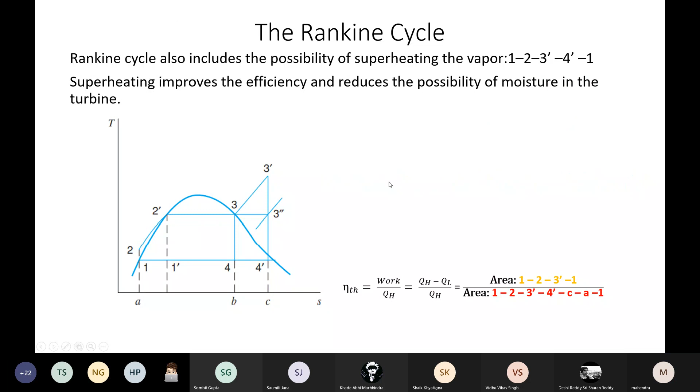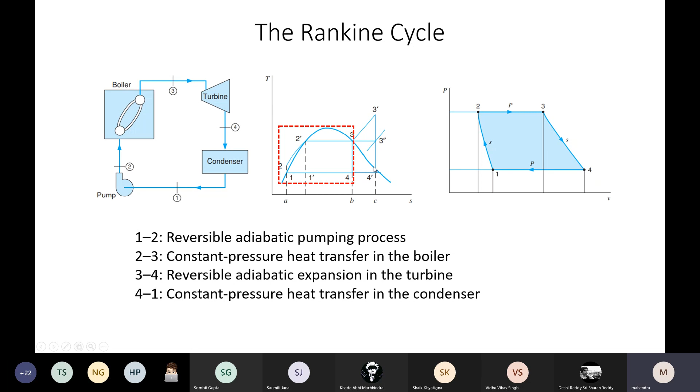Then what will happen if a huge amount of moisture is there? The turbine efficiency decreases; the expansion process is not appropriate. That is anyhow a minor issue. The major issue is the turbine blades will be eroded. These droplets of condensed liquid act like high velocity, high momentum bullets impinging upon the turbine blades, so the blades erode and the surface finish is damaged. Then boundary layer problems will come, as you might have studied in fluid mechanics.

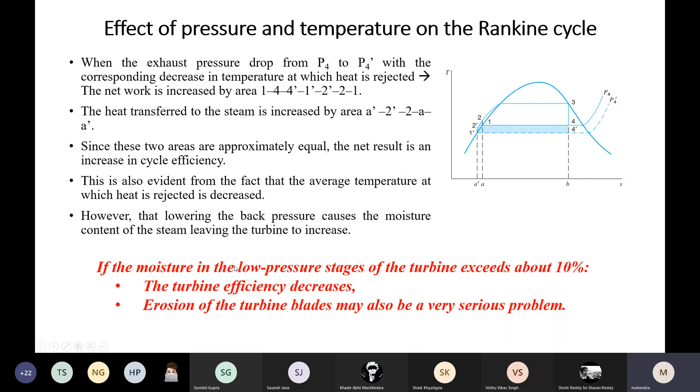So when you are expanding in the turbine, at the exit the moisture should not exceed 10%. Then what should we do? The only way is to increase the temperature of the steam. Then after saturated vapor, the constant pressure line moves like this, and we have taken it up to this.

Then you expand it, and it touches here on this pressure line. So what is the amount of saturated liquid here? A very small, negligible amount, within this 10%, so no problem. That is the reason we heat the steam further to make it superheated steam.

And simultaneously, keeping the percentage of moisture content at the turbine exit constant, once you increase this temperature, you can move more downstream. Suppose I stopped my superheating here; once I start expanding, this line will touch here. Let us assume this quantity of saturated liquid at the exit is just 10%.

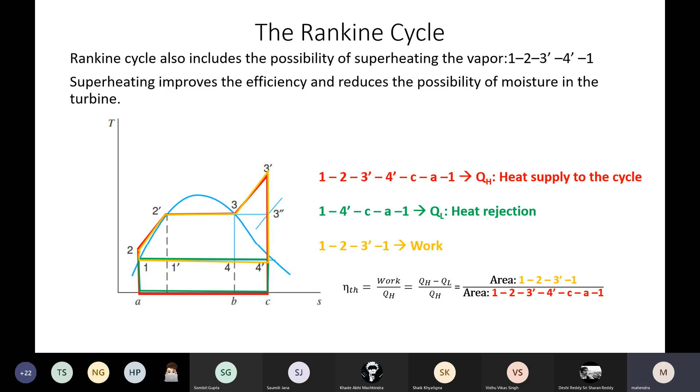That means once you are moving towards superheating condition of the steam, then you can allow the expansion process up to the lower pressures in the condenser. That way you can maximize the work output. You can minimize the heat losses. That is nice. But here the question is, how long can you increase the temperature? If you keep on increasing the temperature of the steam, do you think this turbine material will be sustaining? No, it cannot sustain.

Why? Because whatever the operating pressure is there, that you can convert in terms of stress. You might have studied in your first year mechanics the stress-strain curve. Like that, this pressure is obviously reflecting as the stress. High pressure means high stress. Then simultaneously temperature also you are increasing. The temperature effect is acting upon the material. If you search in Google itself, with increasing temperature, the yield strength of the material would be decreasing.

That means, if the material is at room temperature, you can apply so much of the load. If the material you have heated up to the red hot state, you might have seen in case of forging, you are heating up to become red, 800 degrees centigrade. In case of mild steel, 700 or 800 in the range. Then when you are hitting by the hammer itself, that is changing its shape. That means the metal is very soft at that point. So you cannot heat the steel beyond certain temperature. That will be affecting the turbine material. So that is the reason.

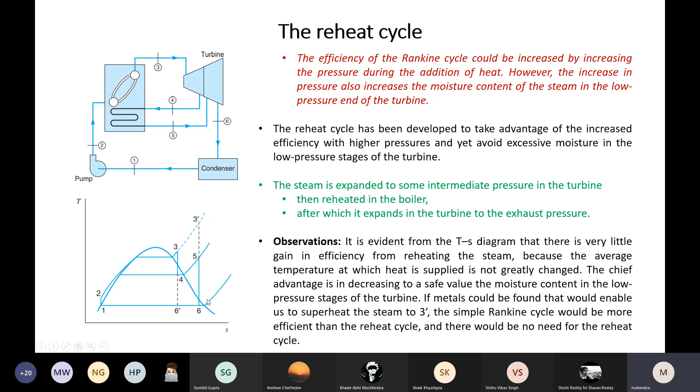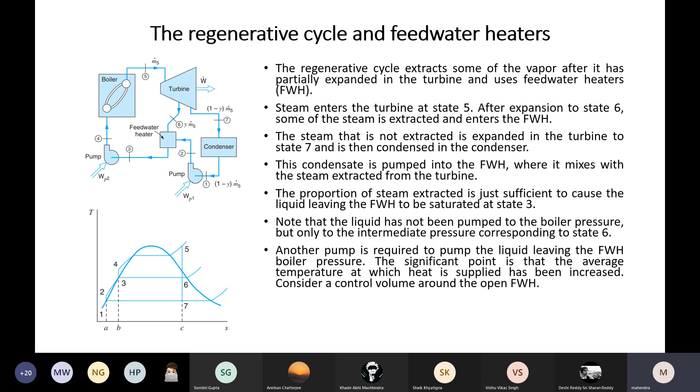Solving the problem for this is not new to you. We have solved these kinds of cycles during the first law and second law of thermodynamics very well, using our EES also. The same thing we will be using, however other things are coming: this much heat addition, this much heat rejection, what is the benefit, what is the efficiency enhancement. These additional things will be added. Otherwise the problems would not be very difficult in this case.

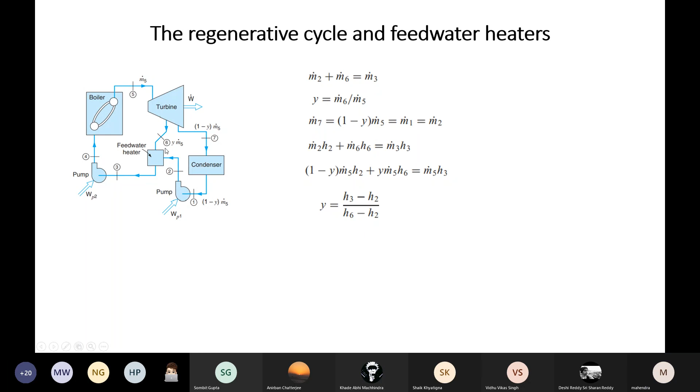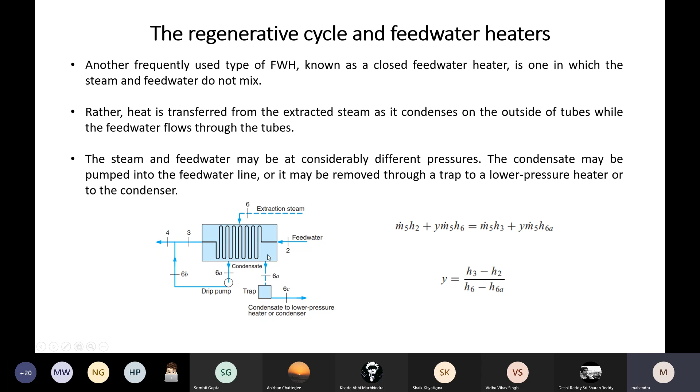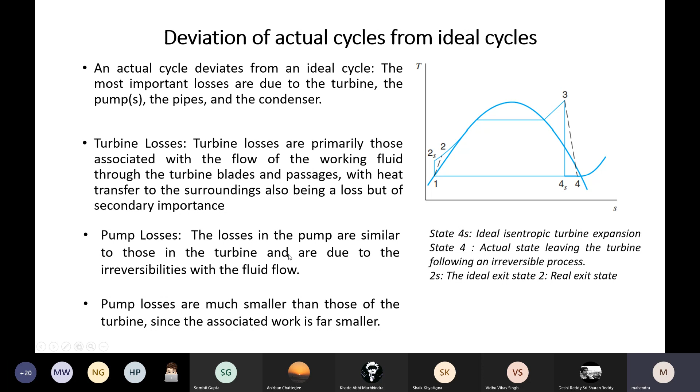Now see here. This is the ideal cycle, the solid line, and this dotted line is the actual cycle. These two we have discussed: isentropic compression as well as isentropic expansion, and the irreversibilities involved. Because of the irreversibilities, this is deviating from the ideal line. Now what is happening over here? This is in the condenser. This is in the boiler.

Again, from boiler to the turbine, it is passing through the tubes, or pipes. Certain heat losses are there in the boiler itself, and also in the piping. However well you insulate, a certain amount of heat loss will exist. No perfect insulator in the world gives you zero heat transfer. So in the piping itself, again, certain heat losses are there.

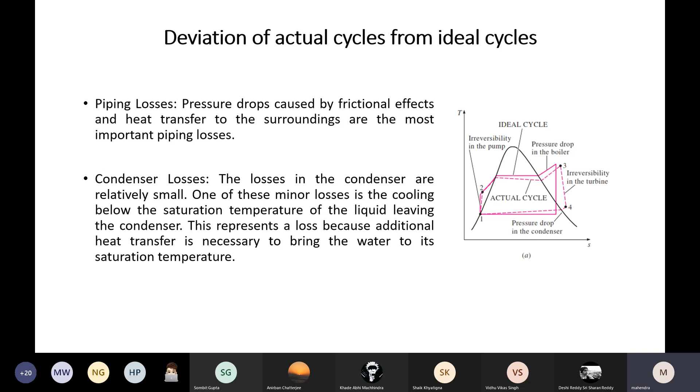And those pipes have certain frictional losses. These kinds of losses are common in your boiler as well as your condenser. Because of that, all irreversibilities together make this ideal cycle distorted like this actual cycle. That is completely about the Rankine power cycle. Now let us discuss something about refrigeration cycles also.

As I initially mentioned, the power cycles, even the IC engine cycle, is a power cycle giving you power. Like that, refrigeration cycles also: phase change refrigeration cycle, phase change power cycle. Similarly, no phase change means single fluid, with power and refrigeration cycles. In this part, we are discussing refrigeration systems with phase change. All refrigeration systems at your home are phase change systems. Let us discuss that in tomorrow's class.